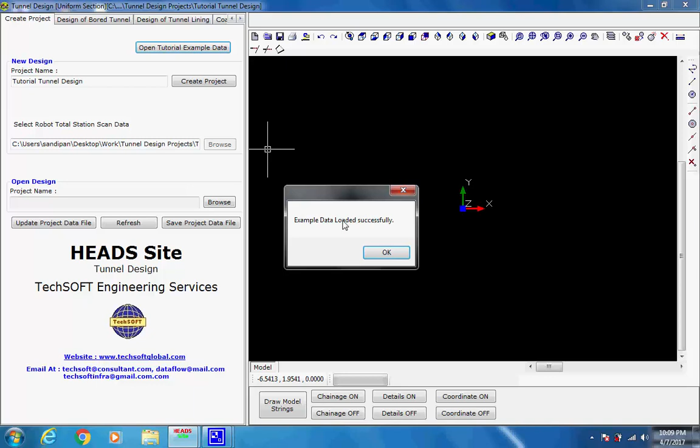Here the user need not click on button Browse, as a copy of the total station survey data file tunnelsurveydata.txt and also the project data file.txt will be brought into the project folder Tutorial Tunnel Design to process. Under New Design, the survey data file is shown with its path.

Design of bored tunnel: design of horizontal alignment of bored tunnel. Select tab Design of Bored Tunnel. Under this, the tab Horizontal Alignment is currently opened, and the option Process HALIGN Design Data is selected.

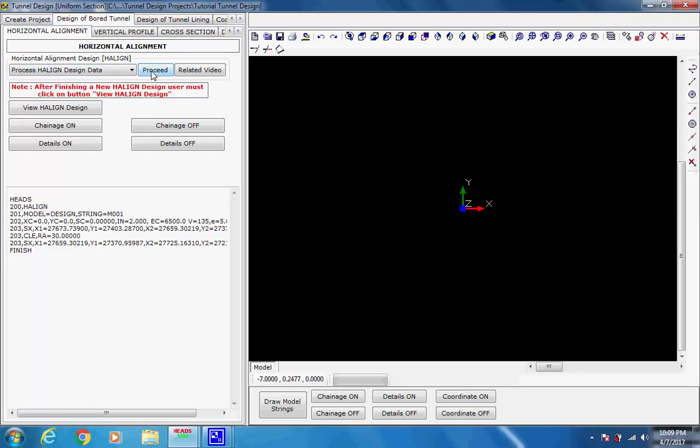Click on button Proceed to create the string M001 under Model Design for the horizontal alignment of the tunnel center line passing through the bottom of the tunnel cross section. To understand the 200 HALIGN data, the user may refer to the relevant section of the user's manual or help in the main screen of HEADS Site.

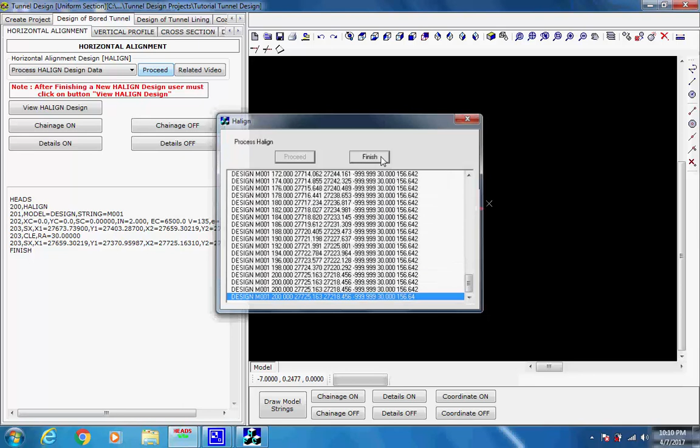As the process dialog box comes, click on button Proceed. As the process is over, a message comes about the output report. Click on button OK and click on Finish. Click on buttons View HALIGN Design, Chainage On and Details On, and the alignment of string M001 under Model Design will be displayed.

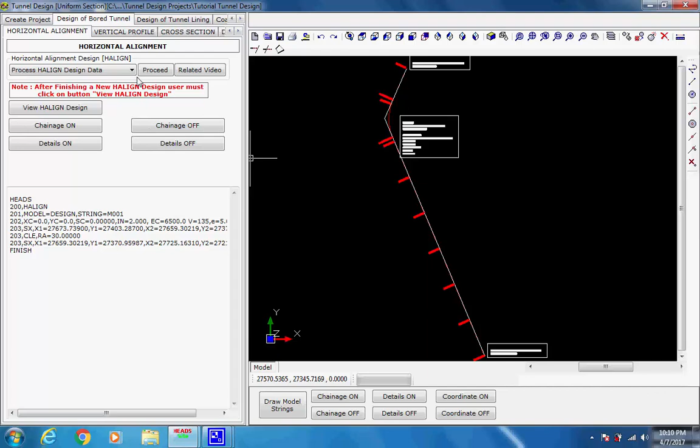Design of vertical profile of bored tunnel. Select tab Vertical Profile, currently opened. The option Process VALIGN Design Data is selected. Click on button Proceed to write the proposed design elevations.

The string M001 under Model Design is already created by the horizontal alignment of the tunnel center line passing through the bottom of the tunnel cross section. As the process is over, the message comes. Click on button OK and then Finish.

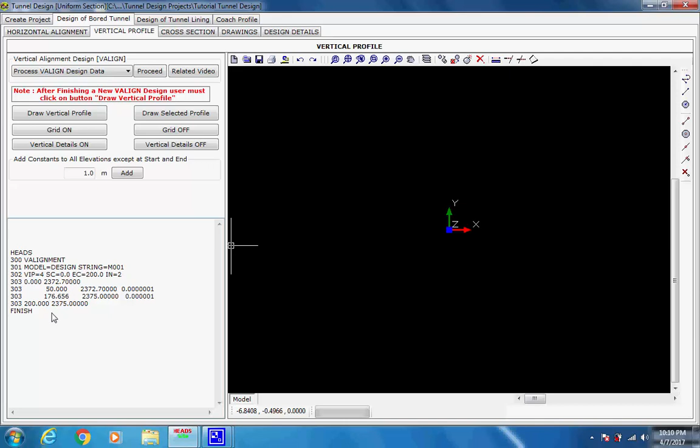To understand the 300 VALIGN data, the user may refer to the relevant section of the user's manual or help in the main screen of HEADS Site. Click on buttons View VALIGN Design, Grid On and Vertical Details On, and the profile with elevation of string M001 under Model Design will be displayed as shown below.

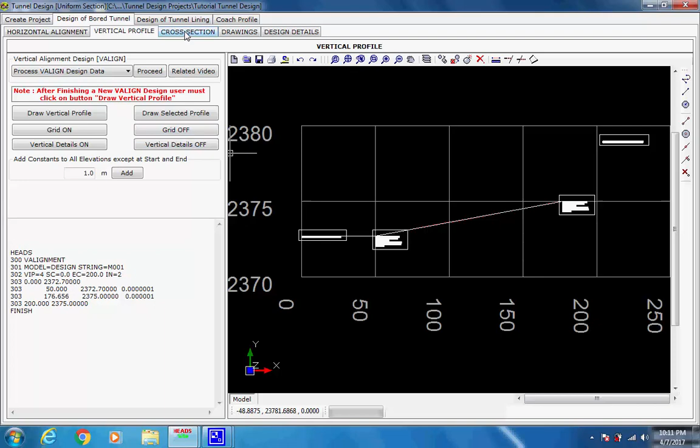Design of cross sections of bored tunnel. Select the tab Cross Section under the main tab Design of Bored Tunnel. There are two more tabs under the current tab: Define Cross Section and Create Cross Section.

As the batch process dialog box comes with a list of two processes in sequence, click on button Proceed. As the process starts, the dialog box comes. Click on button Proceed. As the process is over, the message comes. Click on button OK and Finish.

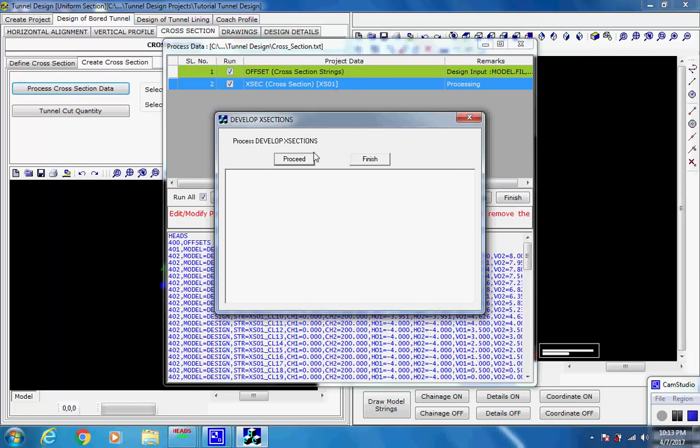The process dialog box comes for the second process and repeat the same actions. Finally, click on button Finish and wait. The entire length of the tunnel will be displayed with design and as-built forms.

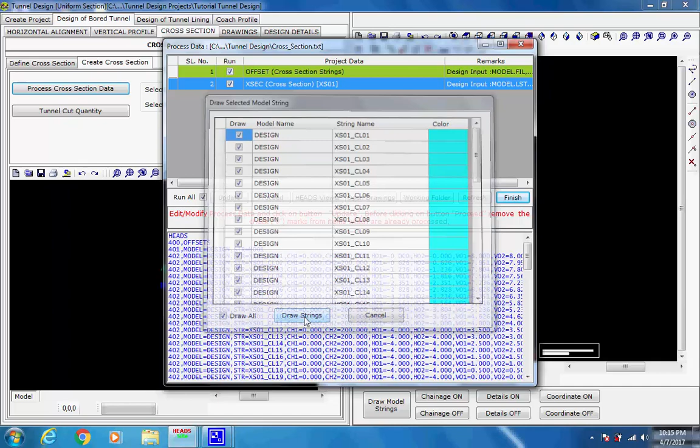The icons for Rotate 3D, Color Fill and Remove may be used for various views.

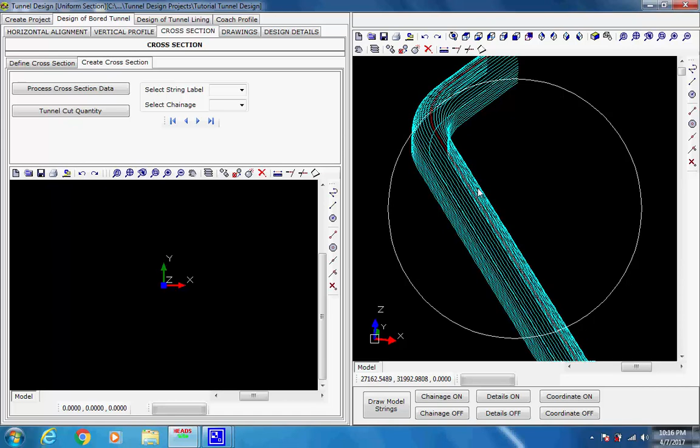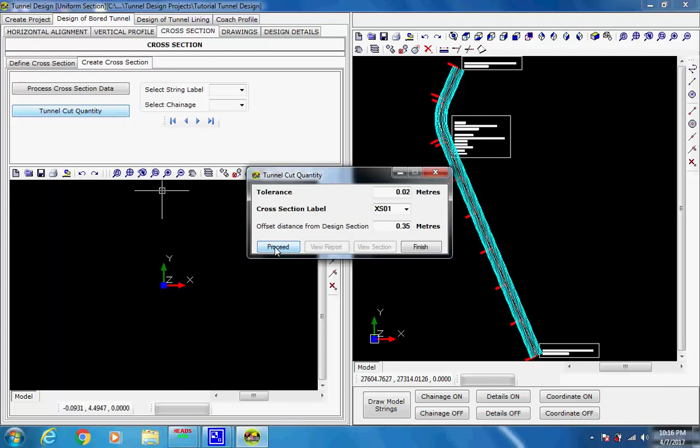Next, click on button Tunnel Cut Quantity. As the dialog box comes, click on button Proceed and wait. The window will come with Chainage-wise as-built and design cross-sections and details of as-built and design quantities. User has to wait until the window comes.

In the window shown below, the various controls are marked to be used for viewing the cross-section and quantity details. Both windows are used for different views of the cross-section and the quantity details.

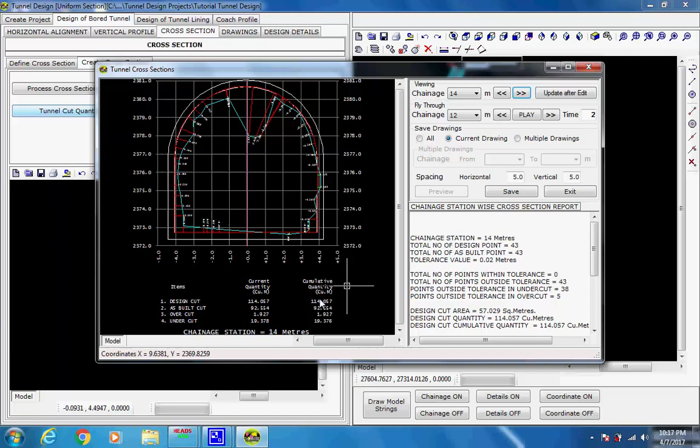The robotic total station survey data is very widely used in the construction of bored tunnels. This is to be noted that the survey is carried out after the boring is done for the tunnel, following the design horizontal alignment, vertical profile, and proposed cross-section for the tunnel. The survey data is used to estimate the actual boring against the design cross-section of the tunnel.

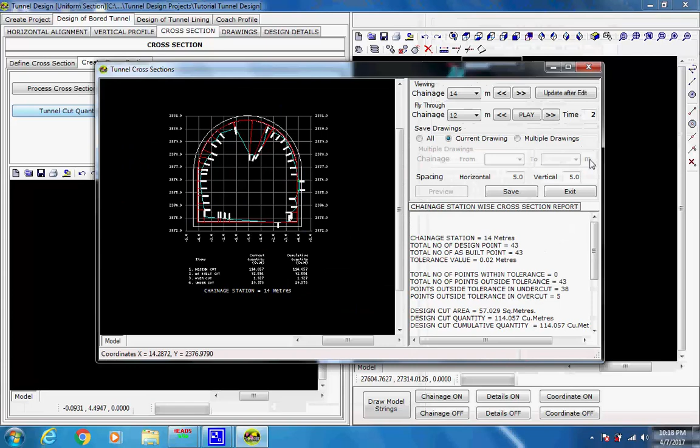At every chainage, the as-built and design cross-sections are plotted. From the cross-sections, the undercut and overcut quantities are computed by comparing the as-built against the design cross-section. Sometimes in case of excessive overcut, the cut quantity is considered up to a certain extent outside the design cross-section, which is marked as the pay line.

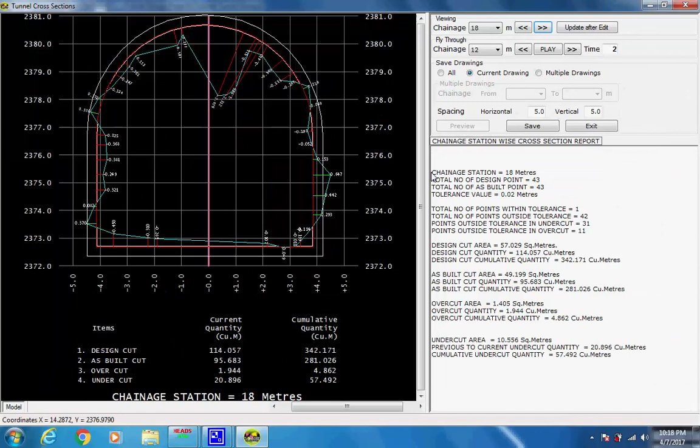Proper measures are to be taken to restore all the overcuts and to remove unwanted soil or rock at the undercuts to match the bored cross-sections with the design cross-section. All these actions can be done by using the robotic total station survey data and thus processing by HEADS Site to generate cross-sections and quantities for design cut, as-built cut, undercut and overcut, and the pay line, also by creating CAD drawings and detail report.

User may use the marked switches to view as desired.

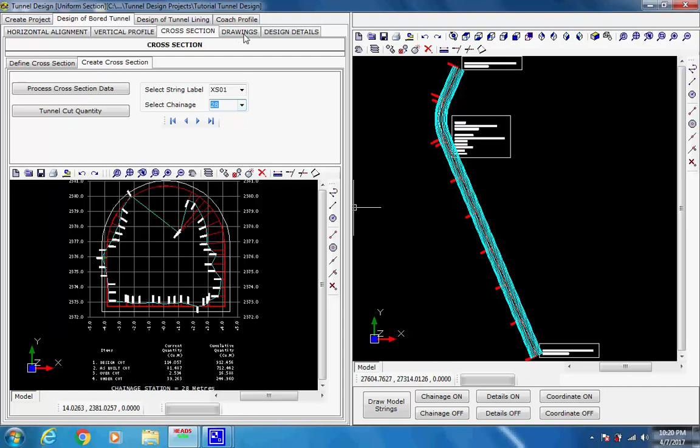Plan, Profile, and Cross-Section Drawings of Bored Tunnel. Select the tab Drawings. Under this there are 3 more tabs: Plan, Profile, and Cross-Sections. The tab for Plan is currently selected.

Click on button Process Data. As the process dialog box comes, click on button Proceed. As the process is over, the message comes about the output. Click on button OK and finally click on button Finish. The plan drawing is created in the project folder.

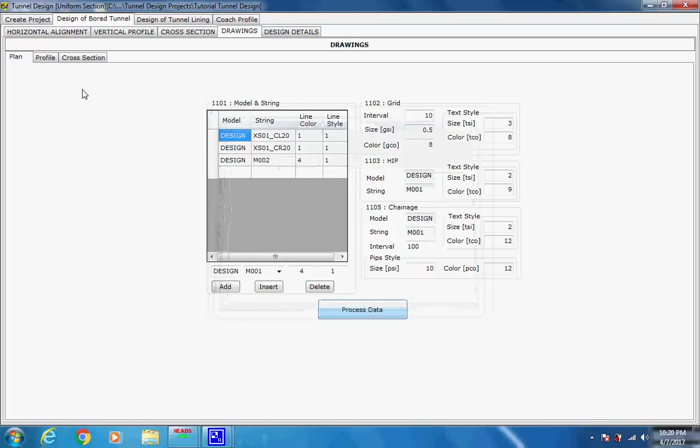Select the tab for Profile. Click on button Process Data. As the process dialog box comes, click on button Proceed. As the process is over, the message comes about the output. Click on button OK and finally click on button Finish. The profile drawing is created in the project folder.

Select the tab for Cross-Section. Click on button Process Data. As the process is over, the message comes about the output. Click on button OK. Design of tunnel lining.

The construction of RCC tunnel lining requires design. Design of RCC tunnel lining requires analysis. Analysis of tunnel lining requires a structural model. Loading requires data in respect of rock or soil mass to be supported by the tunnel lining. Rock mass rating, RMR, with rock quality designation, RQD, is important to apply rock loading correctly.

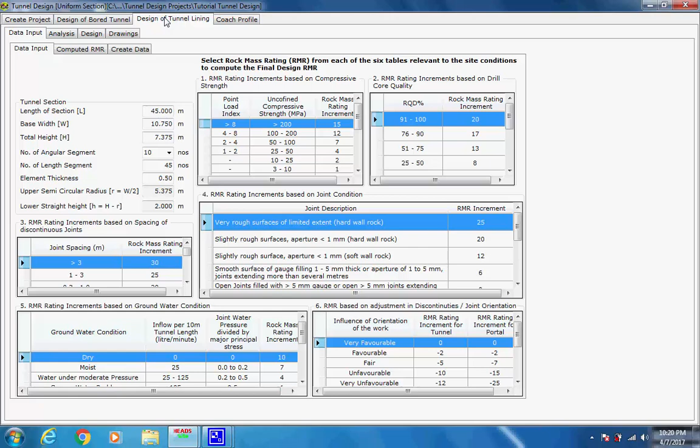Select tab Data Input, and under Data Input various default data are given for every input. User may change the data as desired. Select the tab Computed RMR. Here the calculated values of RMR are displayed. Select the tab Create Data.

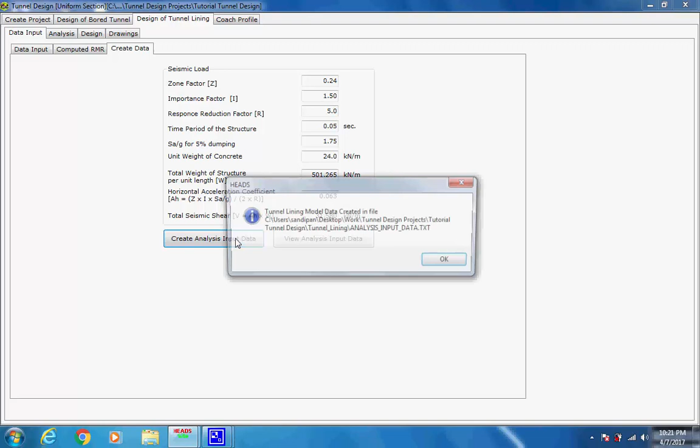Some data are displayed in various input boxes which will be required to create the structural model of the tunnel lining to be used for structural analysis. Click on button Create Analysis Input Data. The message comes informing about the analysis input data. Click on button OK. Click on button View Analysis Input Data.

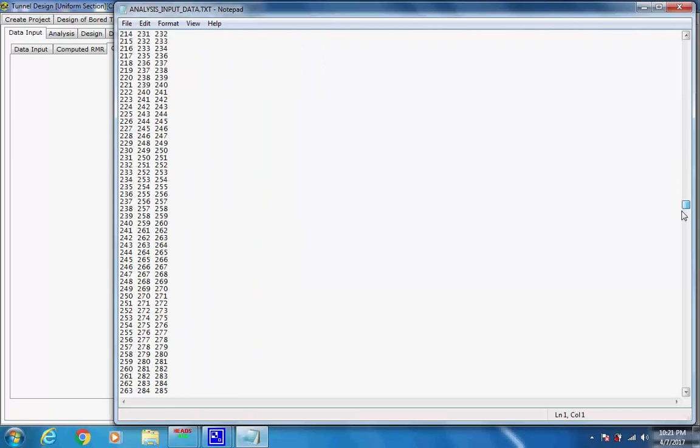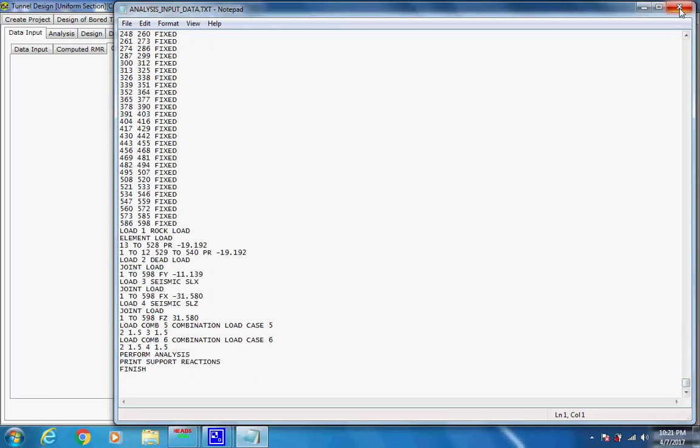The analysis input data opens in Notepad. User may view the data and may take print of the data. There are many tabs related to various aspects of the analysis input data.

Select tab Analysis, select tab Pre-process, select tab Geometry. The structural model is displayed. Use various icons for 3D rotated view of the model, to view members, joints or nodes, supports, loading, etc.

The tab Loading is selected. The list of various loads comes on the left data panel of the workspace.

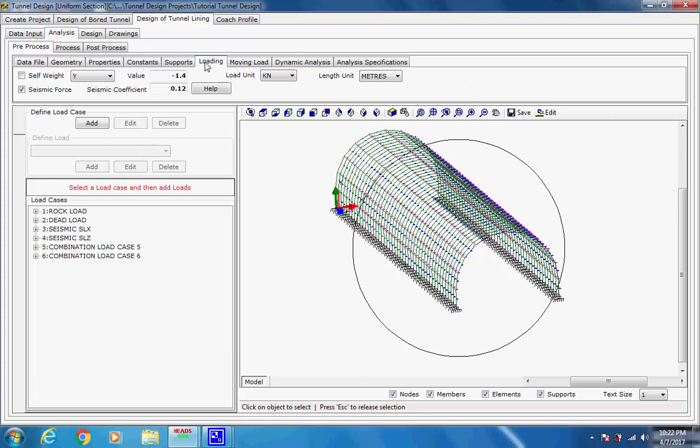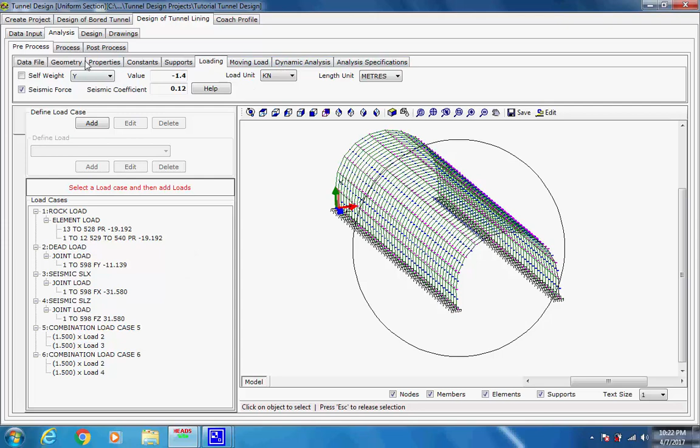User may modify the values of section properties, material constants, support, and loading as desired. User may save the modified or unchanged analysis input data by clicking on button Create/Update Data Analysis Input Data.

Click on button Process Analysis. As the process dialog box comes, click on button Proceed. The number of load cases used for the structural analysis will be displayed.

Click on OK. Next analysis dialog box comes. Click on button Proceed. As the process finishes, message comes about analysis report. Click on button OK. The analysis report is displayed for viewing by the user.

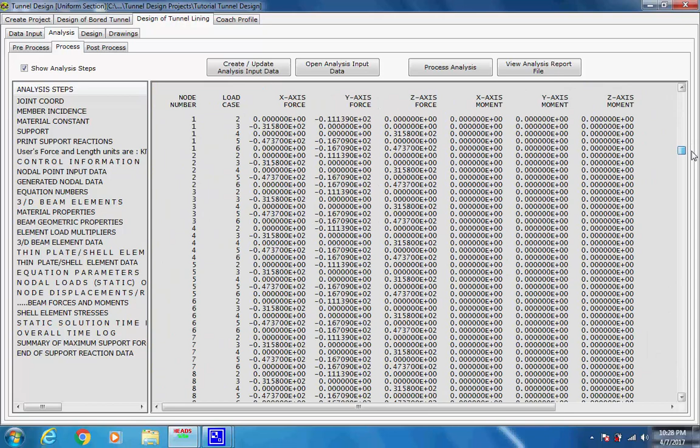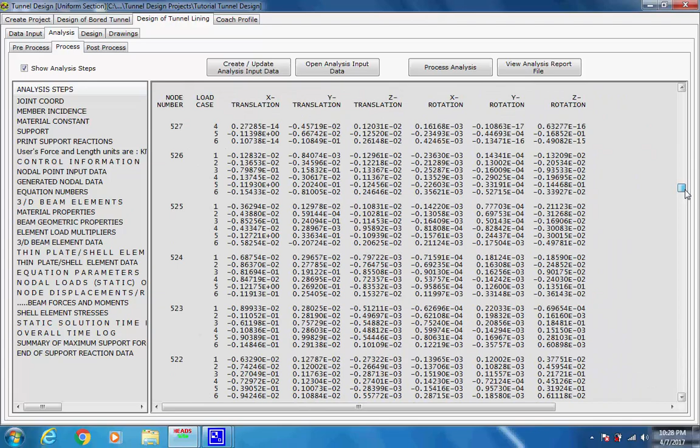The report gives member forces for bending moments, torsional forces, shear forces, and axial forces, to be used for design.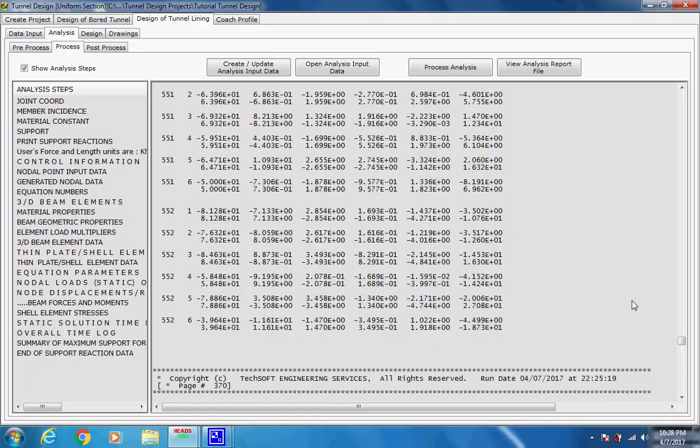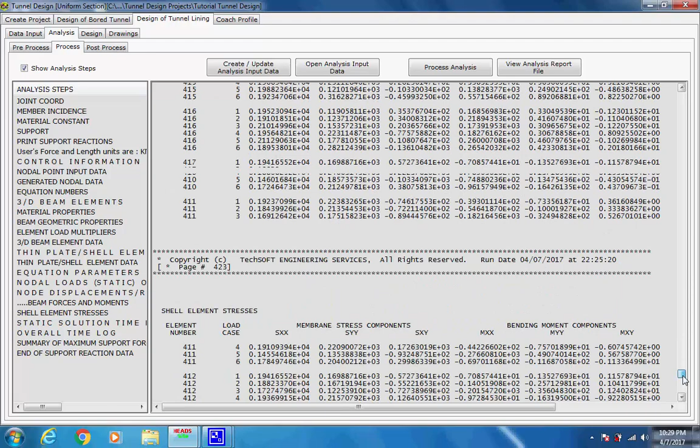After the analysis process, select tab Post Process, then select tab Load Deflection. The deflected shape of the tunnel model under individual load case may be observed. Next, the tab Max Force is selected, which displays each member with the maximum forces picked up from various forces obtained under various load cases.

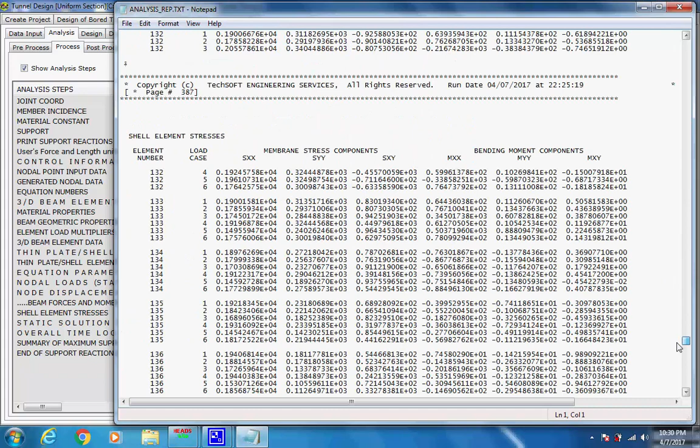For the design of RCC tunnel lining, select the tab Design. The default design data is given for every input, which the user may modify as desired. Finally, click on button Proceed, and the design will be done. A detailed design report will be opened for viewing and printing.

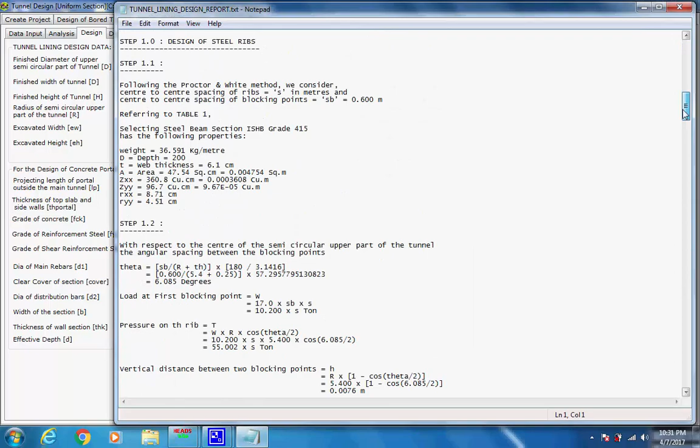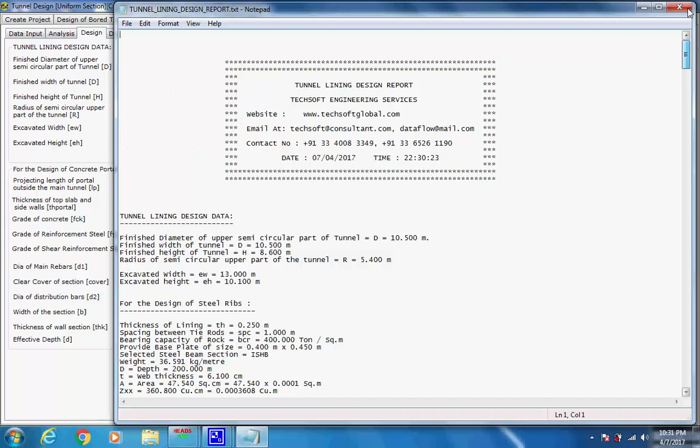Select the tab Drawings as the final production of the analysis and design. A complete set of drawings with default dimensions and structural details are displayed, which are also possible to edit in CAD Engine of HEADS Site for their use in construction as a complete deliverable.

Coach Profile: inside the tunnel, when the vehicle travels at curves, there is super elevation or cant. This makes the vehicle tilt towards the inner side at the curve in the tunnel. It is therefore essential to estimate the lateral clearance of the traveling vehicles at curves inside the tunnel.

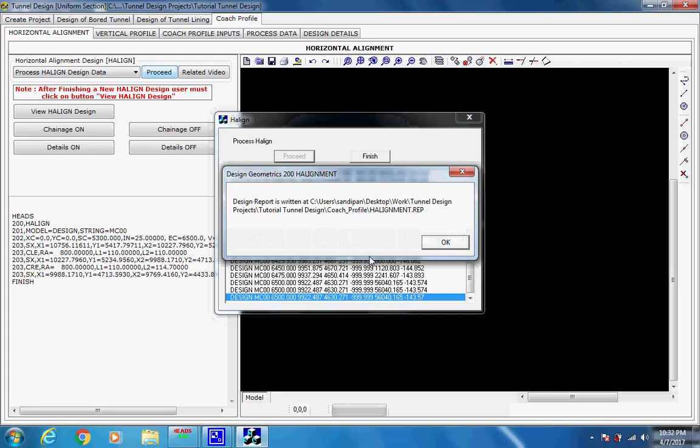Select tab Horizontal Alignment. The example HALIGN data is loaded. Click on button Proceed. As the process starts, the dialog box comes. Click on button Proceed again. As the process finishes, the message comes. Click on buttons OK and Finish. The horizontal alignment of the tunnel center line is created as string MC00 under Model Design in the model files.

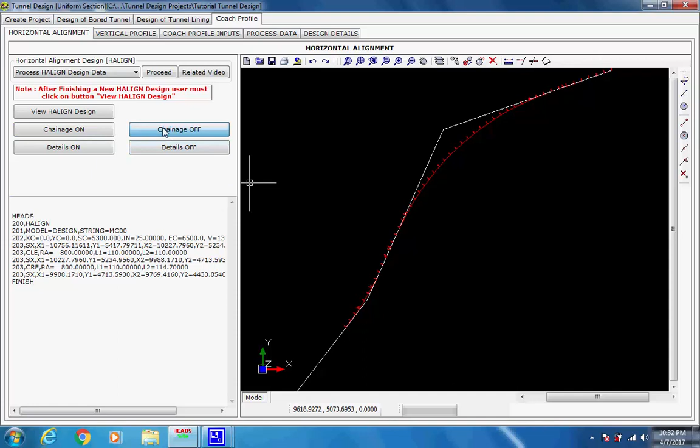Model files model.fil and model.lst. Click on buttons View HALIGN Design, Chainage on and Details on. The horizontal alignment of string MC00 with chainage and curve or intersection point (IP) details are displayed.

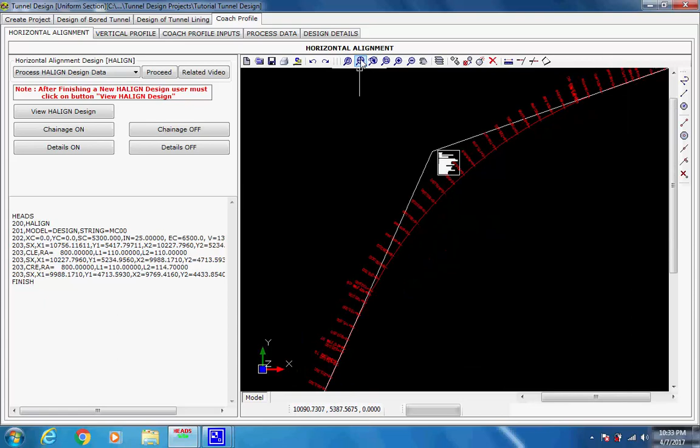Select tab Vertical Profile. The example VALIGN data is loaded. Click on button Proceed. As the process starts, the dialog box comes. Click on button Proceed again. As the process finishes, the message comes. Click on buttons OK and Finish.

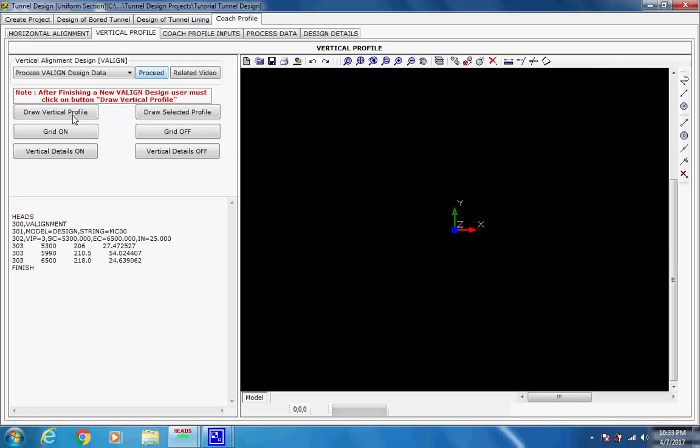The vertical profile of the tunnel center line is created in string MC00 under Model Design in the model files model.fil and model.lst. Click on buttons Draw Vertical Profile, Grid on and Vertical Details on. The vertical profile of string MC00 with chainage and vertical curve length and vertical intersection point (VIP) details are displayed.

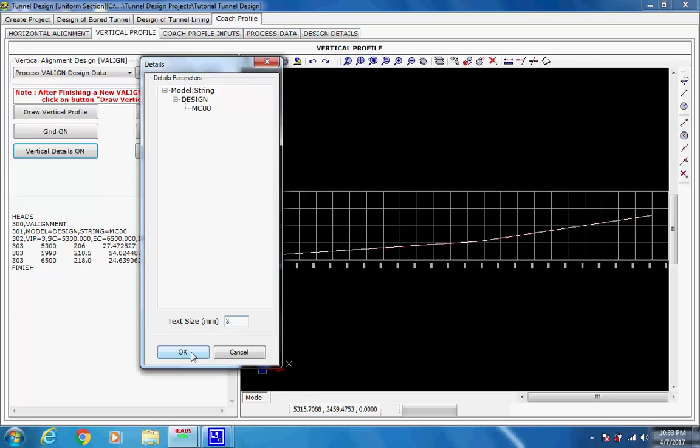Select the tab Coach Profile Inputs. Data at various inputs are displayed in this page. In a new design, the user has to enter the data as desired. Here in the dual cell tunnel, 2 coaches of underground metro train, on either side of the tunnel central wall, are shown. At each curve the coaches will be tilted towards the inner wall, and the available lateral clearance is to be checked against the standard specification.

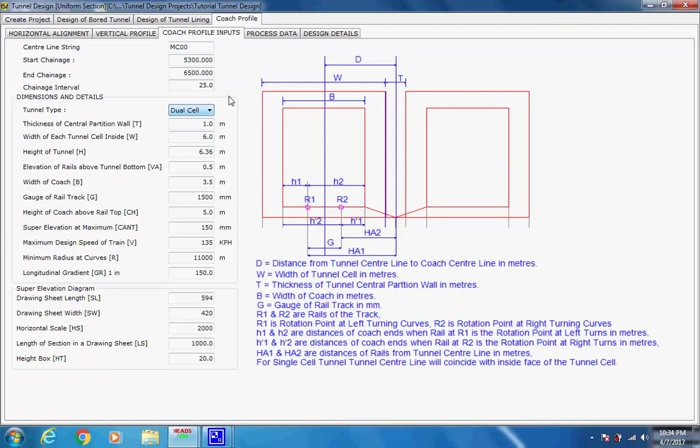Select the tab Process Data, click on button Process Coach Profile Data. The batch process window comes with the list of 4 processes in proper sequence. Click on button Proceed. For each of the 4 processes, every time the process dialog box comes, the user has to click on button Proceed. As the process finishes, the message comes. Click on buttons OK and then Finish.

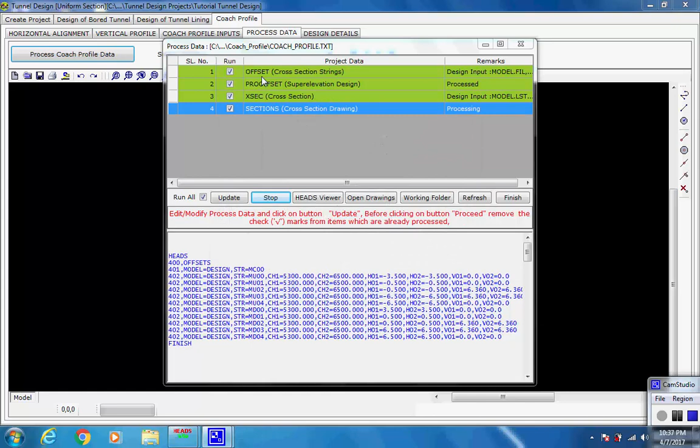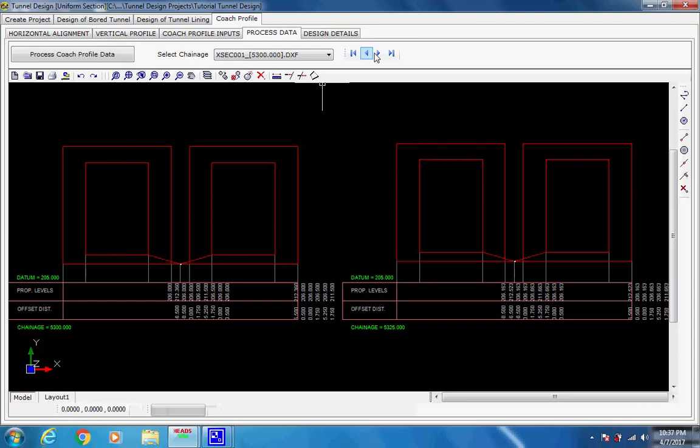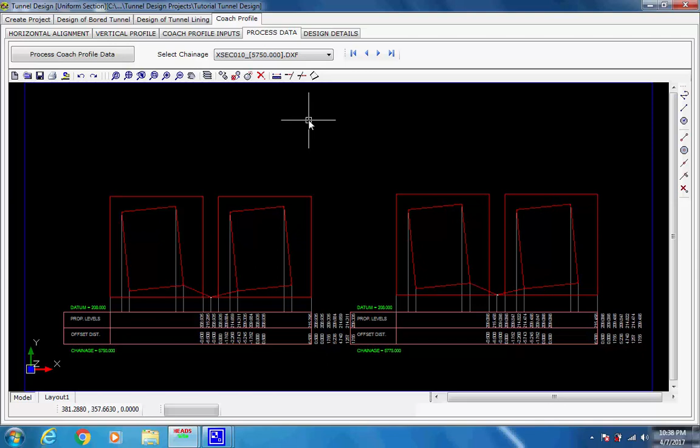Select the tab Design Details, click on button Create/Update Project Data File. The project data file is displayed and the message comes. Click on button OK.

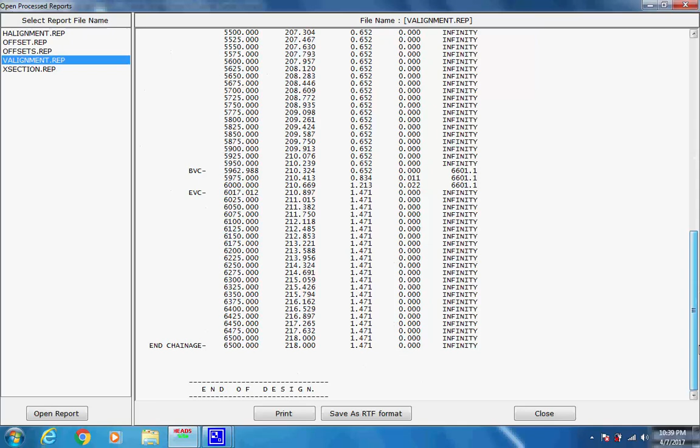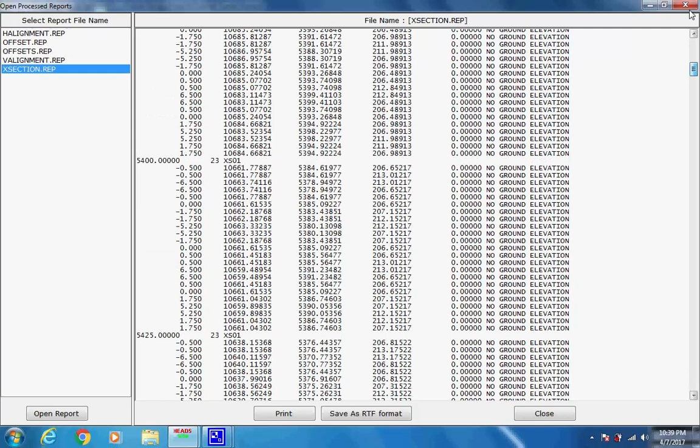Next, click on button View Drawings. This will open Heads CAD Viewer to view the complete set of drawings as created. At each drawing, 2 cross-sections at a chainage are displayed. The user may select a chainage from the list as shown on the left side.

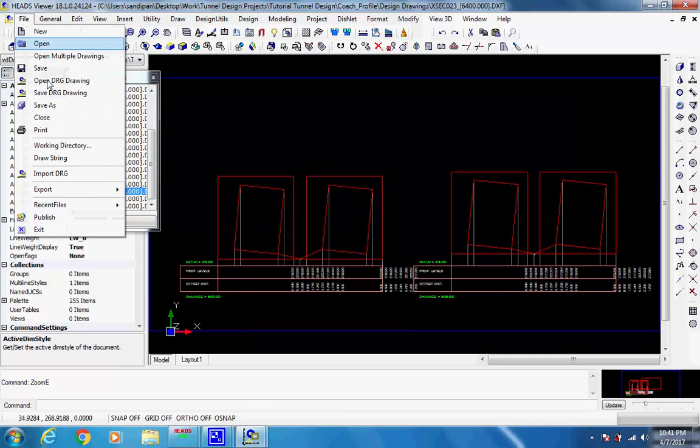The drawings may be printed or saved as DWG or DXF in a desired folder.

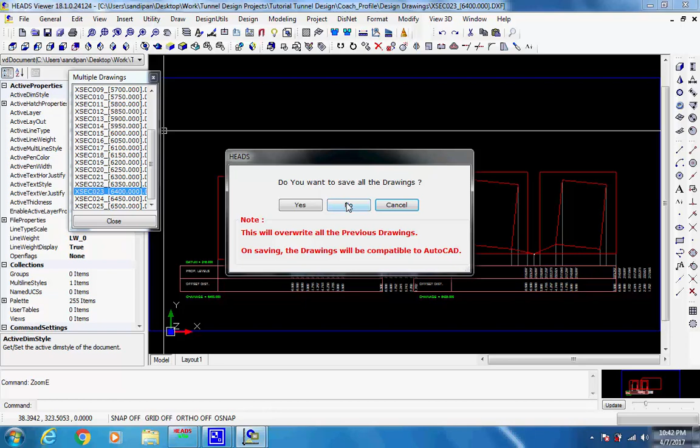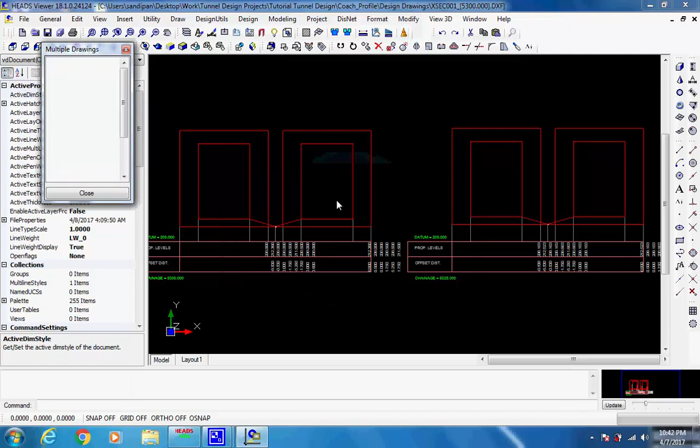This is the end of the session for processing of robotic total station survey data, along with creating the alignment, profile, cross-sections, and cut quantities for design and as-built sections of a bored tunnel, tunnel lining and coach profile.